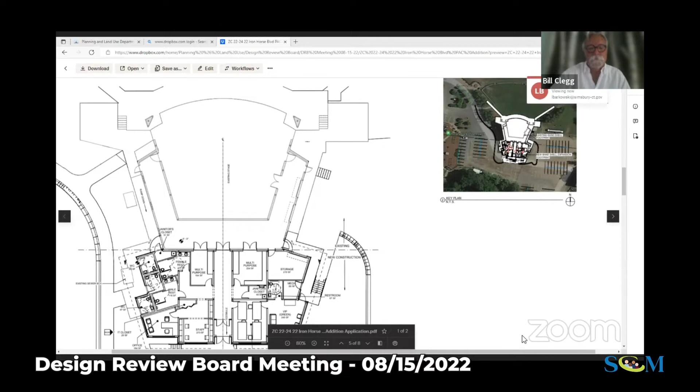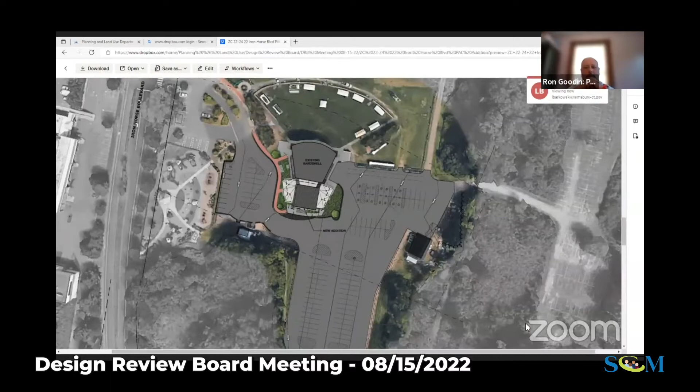Steve, I think you're trying to talk, but you're on mute. My turn to say that - and I live to catch people doing that.

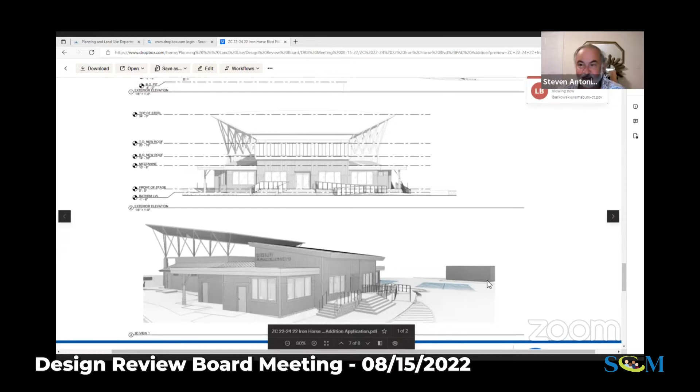Anyways, while we were scrolling through, one question that came to mind, just as much curiosity as design review - will the parking lot be paved? The parking lot is already paved, paved at the beginning of this season. Yes, it was one of the projects we've been working on with the town for quite a long time, and we are very thrilled that that parking lot is paved.

It's a nice improvement. The other piece to add is both Ron and I worked hand in hand with the town on the layout of that parking lot, so that there really is hopefully no work that has to be changed on the parking lot work that's just been completed, to be able to allow us to do what we're looking to do here.

Okay, that sounds like a great overview, Bill. Hold on one sec. Certainly open to questions. I'll speak first.

I don't really have too many questions because you follow the lines of the original structure. I see the vision continued, and it seems to be consistent. I don't see it affecting any of the neighbors, and you're using similar building materials that's consistent with the existing structure. There's no additional brownstone, but I'm sure that's somewhat cost prohibitive.

There's a little bit. So if you look in this image, there's a little pillar right outside those restrooms. There's a little bit more brownstone added. That's cool. And I love the way the support follows the same supports for the main stage.

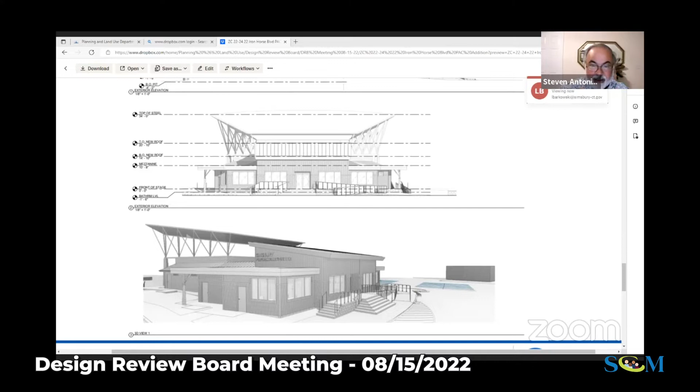Polly, do you have any questions while we're in the open forum aspect of the presentation? Actually, I don't. I think it looks amazing, and I can't wait for it to get rid of those trailers that are there right now. Neither can we. I have been on the new pavement, and it's so nice and clean. I have a habit with a couple high school friends of picking up trash, and now that this has been paved, people don't leave their trash on the parking lot because it's so blatant. So anything to clean up and help people keep it clean, I'm all for it.

Cool. Thanks, Elaine, do you have anything in the open forum? We still can deliberate, of course, but no, I don't have anything. I think it's a great job. It meets a lot of functional needs that needed to be met while still preserving the attractiveness of the facility. So I think it's great.

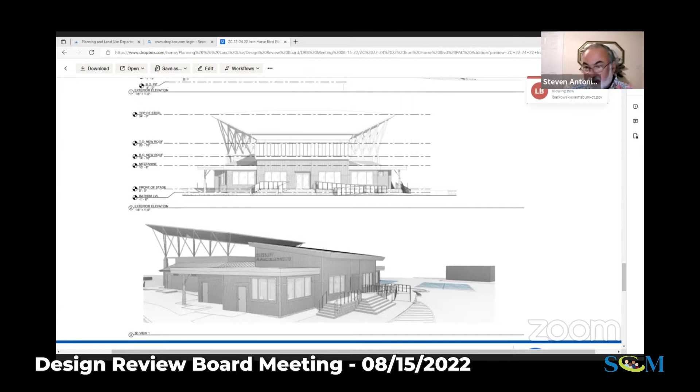Thank you. Okay, I'd like to invite anyone else from the general public, if you have any comments or questions, to speak up now. Okay, hearing none, let's close the application and deliberate amongst the commissioners.

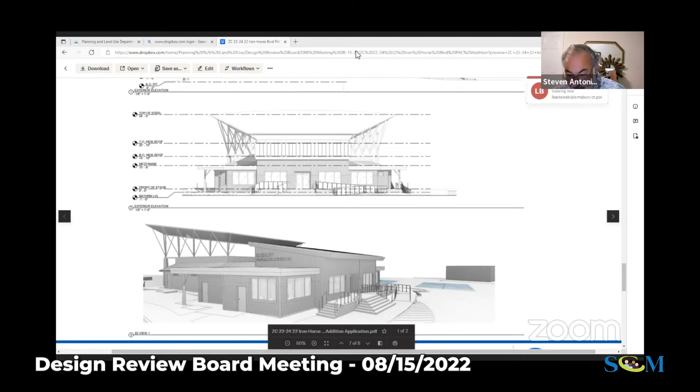Hey, George, is he still here? George, do you want me to make a motion for a positive referral prior to closing the application or after closing the application and deliberating? You know, I think because you're advisory, technically it doesn't matter. So I think it's appropriate right now if you're ready to.

Okay, well, let me check with the other commissioners, being Polly, Elaine, and Anka. Is there any further deliberation you guys would like to discuss? Nope, I don't have anything on this one. Then there's no reason to delay.

I'd like to make a motion for a positive referral of application ZC 22-24 of the town of Simsbury, owner Bill Clegg, applicant, for a special exception site plan sign permit pursuant to section 6.3 of the Simsbury zoning regulations to construct a 3,000 square foot plus or minus addition in the floodplain zone at 22 Iron Horse Boulevard.

Would someone like to second that? I'll second. Thank you, Elaine. All those in favor? Aye. Aye. There's nobody to vote nay or abstain, so it's unanimous. Your positive referral. Good luck when you get to zoning, and thank you for taking the time to take our input.

We thank you very much. I really appreciate all your comments. Thank you, have a great night. Thanks, folks, have a great night.

Okay, bye-bye, good night. Okay, moving along, our next application. I'm sorry? I thought someone said something.

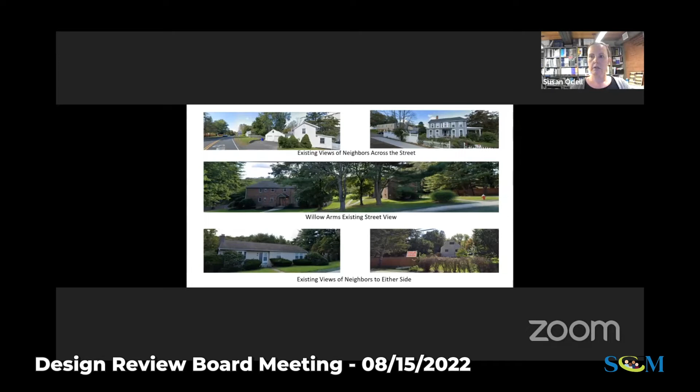The neighborhood of Tariffville is a typical New England village. It's got a mix of housing types and styles, including picket fences, walkable streets, and even colorful displays of civic engagement.

Willow Arms was last renovated in 1996-97 when the wood siding, porches, and community building were added. Though the property has had continuous routine maintenance since that time, it is overdue for a refurbishment that brings it up to the modern requirements of energy efficiency, improved living standards for the residents, and appropriate neighborly presence in Tariffville.

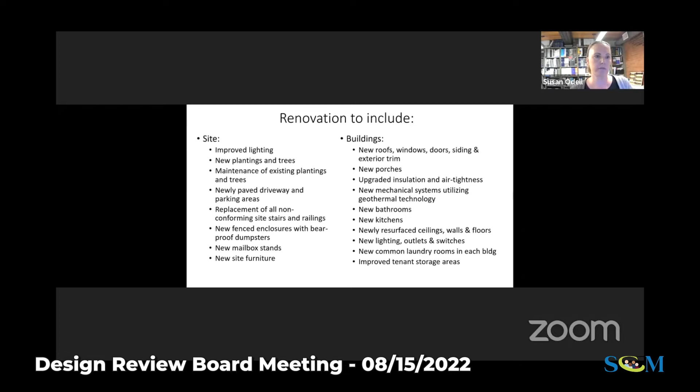Here's a proposed view of the same buildings. We are adding shutters and window boxes along the street facing view to help those small window openings have more presence. We're adding 2-story porches, mostly along the courtyard sides of the buildings, but we wanted to add one on the street facing side of building 1. There are new overhangs at the basement doors that you can see over here on the side. And in general, new siding, roofing, and exterior trim.

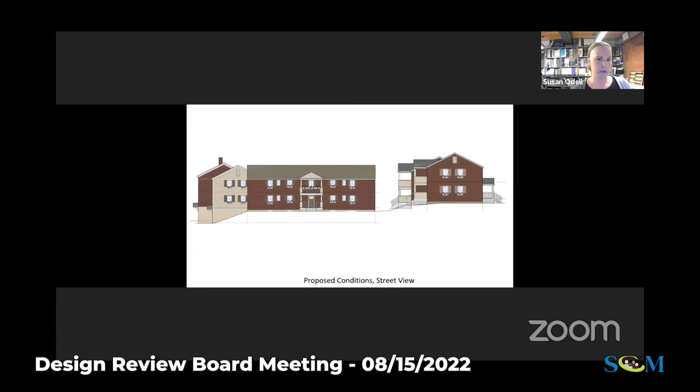So we are proposing 2-story porches, which will give each resident a private outdoor space. They are connected by an expanded 1-story entry porch. To address the striped facade problem, we chose to install siding that is the same color as the brick so that the facade blends into a background and lets the new porches shine.

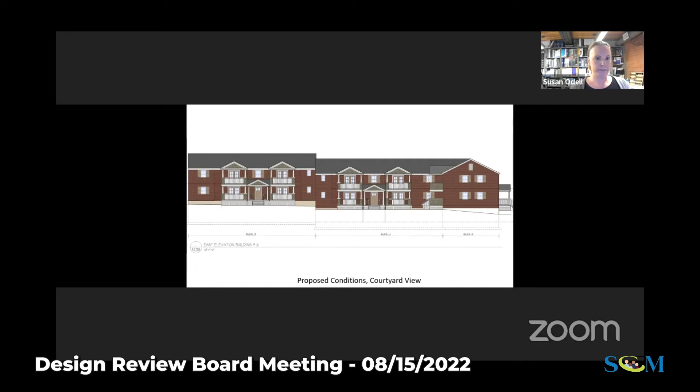Here's existing conditions of the drive along the driveway side, further back into the site, and you can see clearly that the buildings are in need of refurbishment. Here's the proposed view of that same grouping of buildings with new porches, siding, shutters, roofing, windows, and doors.

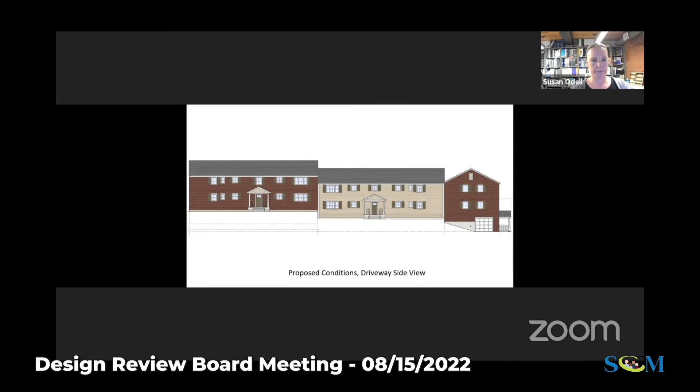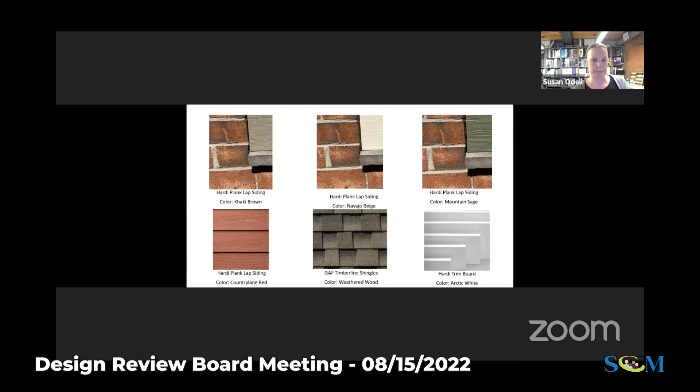And finally, here is our proposed new look of Willow Arms. The goal of the project is to provide improved and more visually attractive living spaces for the residents, incorporating increased energy efficiency, improved indoor air quality, new private outdoor spaces, improved public outdoor spaces, improved trash management, and enhanced building facades that are better suited to the design standards of Simsbury. And that's it.

Are all the tenants going to have to move out in order to have this done? It will be an occupied renovation, so they'll be doing it one building grouping at a time. Okay, it's not really part of this, but I'm curious. So it's not going to be as invasive as it could be. It's more of a challenge. A builder of course prefers a big empty site, but we do occupied renovations all the time.

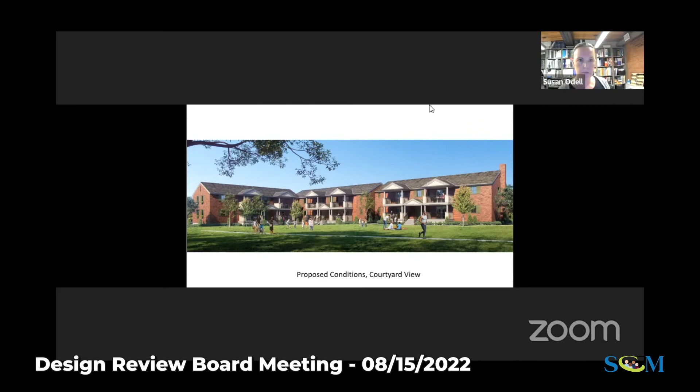So we've had a solar company analyze the site and tell us which locations are feasible. I just want to see if we got that information in the set to you, and I don't see it yet. I see notes of existing solar on... it's not in the landscape set, so it wouldn't be in here. Basically it's the south-facing facades. Let me see if I can use this to back up. Oh, they were in the last picture. There you go.

So north is here along Elm Street, south is here. So all the south-facing roofs that don't have the giant big trees in front of them have potential for solar, so like these two, this one, basically the southern facing ones. So you won't be able to view them coming down from Elm Street. No, that was my main concern. And that's kind of nice.

Right, okay, that's good. Okay, the other thing I noticed was whoever did the landscaping plan, accolades to that person, they put some time into thinking that through. It's really a nice plan. Back to my points though, the first floor balconies, just to confirm, there's no access to these by the tenants directly from grade?

Correct, the lower unit only. The porches are all accessed only from inside the units, so they're enclosed. It's consistent - the railing is the same upper and lower.

Right, okay. Those are the extent of my questions. Is there anyone from the general public or anyone else that would like to ask a question while we're in an open forum for clarification or comments?

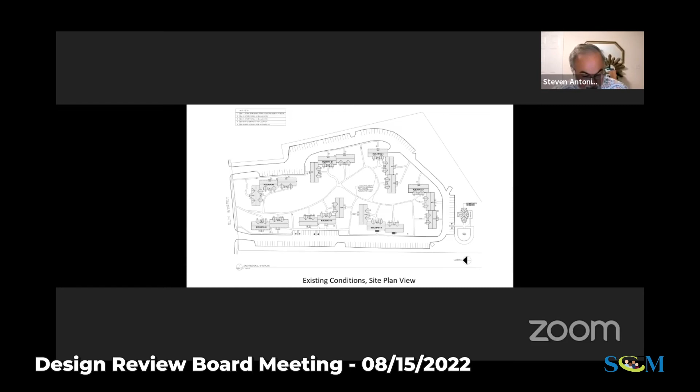Okay, hearing none, I think we will close the application so we can deliberate amongst the commissioners.

Anka, how do you feel about it? It seemed pretty positive - absolutely, it's an improvement. Realistically, what else can be done? It's nice, it will help the property overall and the people who live there.

Okay Elaine, do you have any comments? No, nothing beyond what I already said. I think the colors are kind of traditional and won't go out of style next year. It's an improvement.

It's a thumbs up investment too. You can see the investment, which is appreciated by our town. Polly, what do you have? Nothing further, all good.

Well, with that being said, I'll just do it. I'd like to make a motion for a positive referral of application ZC 22-26 of Willow Arms Mutual Housing Association, owner Susan Odell, applicant, for a site plan amendment pursuant to section 11 of the Simsbury zoning regulations to perform site improvements to exterior and interior features, lighting and landscaping at 55 Elm Street.

Would someone like to second that motion? Sure. All those in favor? Aye. It's unanimous, no one left to vote nay or abstain.